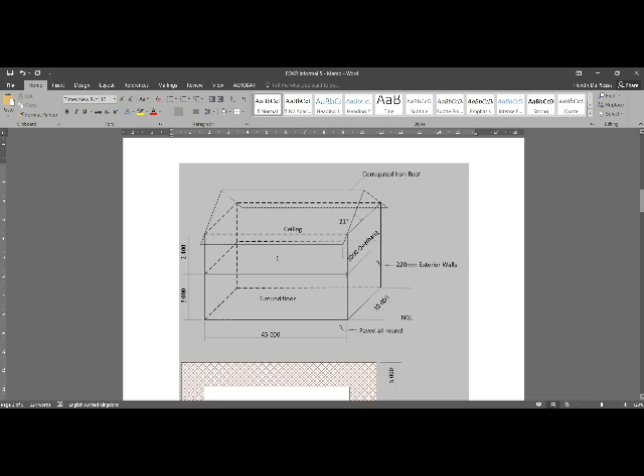Okay, so in the first clip I just went through the question. Now the second section, you will see I'm just going to go quickly through the drawing. So here's our new hospital that we need to construct.

So you would see that we've got a total floor area of 45 times 10, and I had the question on whether you can use a single story building, comparing it to a double story. Yes, in this instance, that was all that you had. If you do have a double story building, it's always good to compare the costs between your ground floor and first floor, if you do have that type of information.

But with this question, you didn't have that luxury, so all that you had to do was basically use the cost that you would calculate from figure 3 and times that with the volume of your figure 1. So just keep that in mind.

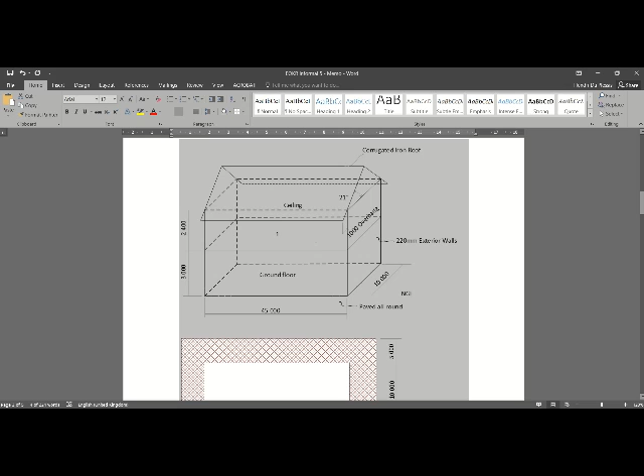Also, you would see that we had some new external paving that was added. I didn't add any external works like pipe work and groundworks and so on, just to keep it simple. Otherwise it just becomes too much to calculate. But you will see as I go through the calculations with regard to that. Obviously, if I do include some other items, you need to take that into account. But usually in a test, that's too much information to try and have in one specific question.

So that was excluded. So the only thing that you had to do was to calculate your volume cost and then add your paving area as well, so that you can actually get to your basic cost to which you can add your P's and G's, and then your contingencies and VAT. Okay, so that was that.

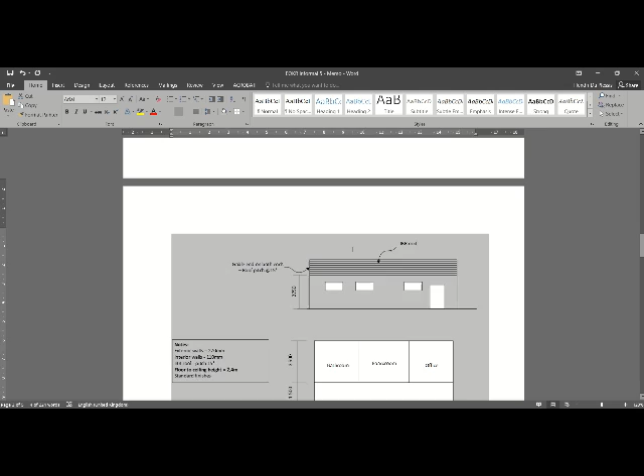Then drawing 2 or figure 2, your historical office building. The only purpose of this building was to calculate your paving area. So you didn't have to calculate the volume of this, and you would see there was a couple of catches here anyway with the wall plate height, the ceiling height, and so on, which all differed, which I think many of you guys took cognizance of. Just be aware of that. That might be a thing in other questions, to actually use the correct height.

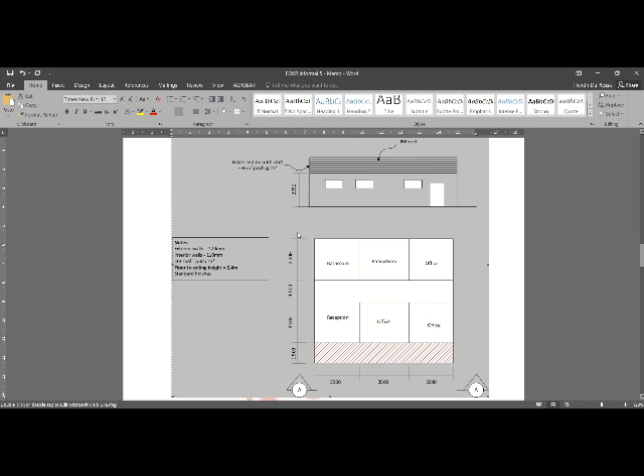So just remember that if you use your cube method, it's from the top of your strip footing up to the middle of your roof area. So it's always good to draw it out from the gable end, just to see that you've calculated your height correctly. So just make sure that you've got that. Okay, so have a look at that so that you understand how that's calculated. I'll maybe make another video on that just to clarify that, but that's irrelevant for this question. Okay, so that's basically it.

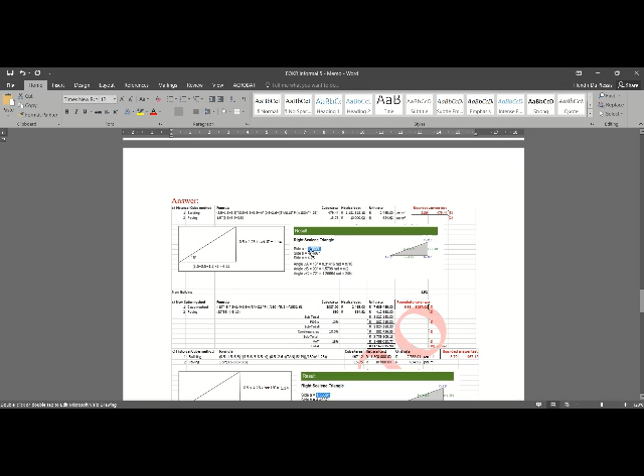So just going through the memo. If you do go through the memo, this is all the information provided, and then you would see I've added the memo and the calculations here. So this was basically all that you had to do, is you had to calculate your historical values. You can see the paving is added here and the building volume here, so that you can actually calculate your basic rates so that you can apply to your new building right here at the bottom.

Okay, and then you would see that I've added two answers. The one actually has your historical rate excluding your P's and G's, and then we've got a second answer which most students used, was basically just using your basic historical value here to calculate your rate per volume.

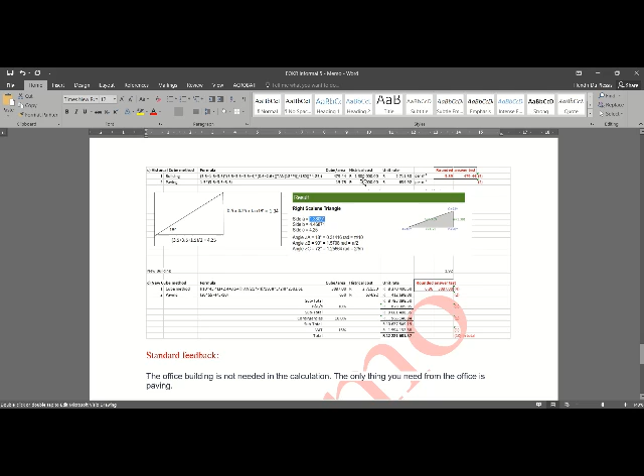Okay, so in the next clip that I'm going to show, I'm going to use the 1.3 million because it's just easier to calculate, but you can have a look at the 1.1 million that I calculated here, how that was done. I'm going to explain that in the next clip, and also in the next video with the next method of calculating your new building estimates. Okay, so just be aware of that.

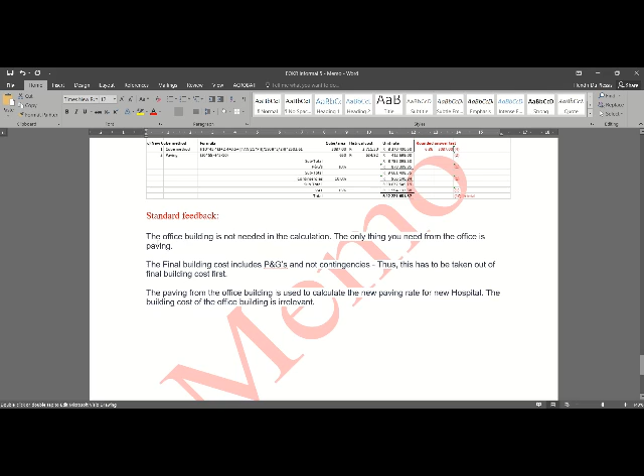And also then I just added one or two basic feedback items here at the bottom so that you can just see one of the common things that was asked. So in a nutshell, that's basically how the memo works.

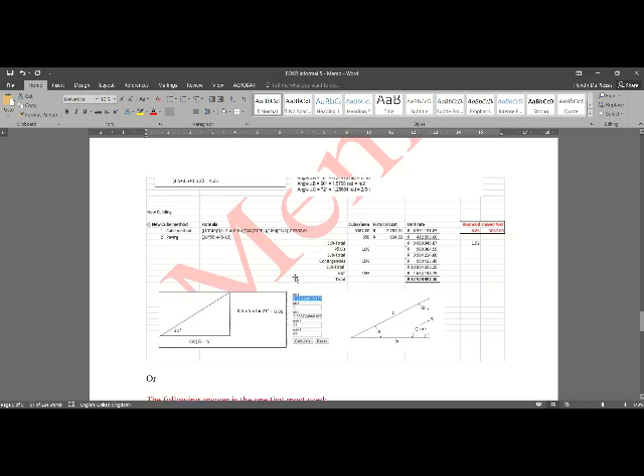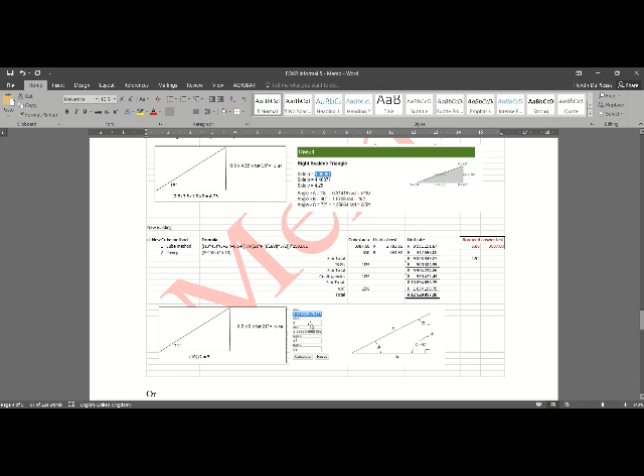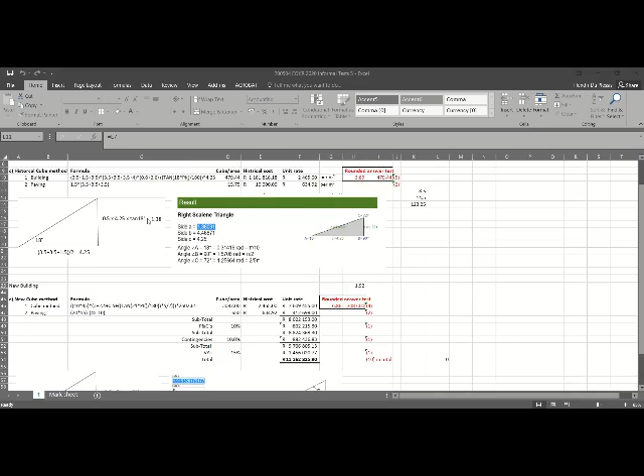Okay, so let's get into the calculations. Firstly, our historical building: you would see that the memo shows you basically the following, and you will see that I've added how the area was calculated first. That is times with your total height. So you go to your drawing.

So the first applicable area or volume that you need to calculate is your figure 3. So you would see this is the 3.5, 1.5 and a 3.5 added together times your length. So it's your length times your breadth, and you would also see that the information actually showed your wall plate height as 2.6 here,

and also the top of your strip footing is calculated by subtracting the 200 millimeters here from your 800 millimeters here. So you couldn't use the 0.8. There was one or two students who actually used the 0.5 instead of the 0.6. So just make sure that you do read your question thoroughly whenever you do that.

Okay, I'll do a little clip on how that is calculated, because you would see that this is calculated to your wall plate height. So just bear that in mind. So let's get back to the calculations. So you've got your 0.6 here and your 2.6 meters to your wall plate height, and then you've got your tan calculation here, or the middle of your roof.

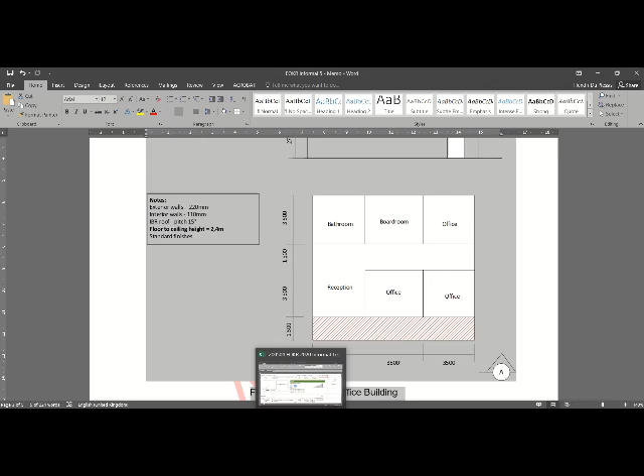you with that. So you would see that you calculate your area, which is again your length, the 3.5 plus 3.5 plus 3.5, times the 1.5 meters wide. So to get your volume or your square meter area, which is this 15.75 square meters here. Then you take your 10,000, that's here in your question that was provided, and there were no P's and G's included in this because this was your basic cost given to you.

Okay, so again, make sure what is included in your basic cost and what is included in your final building cost. So a little bit of a trick question if I do ask that, so just be aware of that. Okay, so then basically just divide your 10,000 by the 15.75 to get to your 634 rand per square meter. And that's basically how you calculate your historical data. So in the next clip we're going to apply this to our new building.

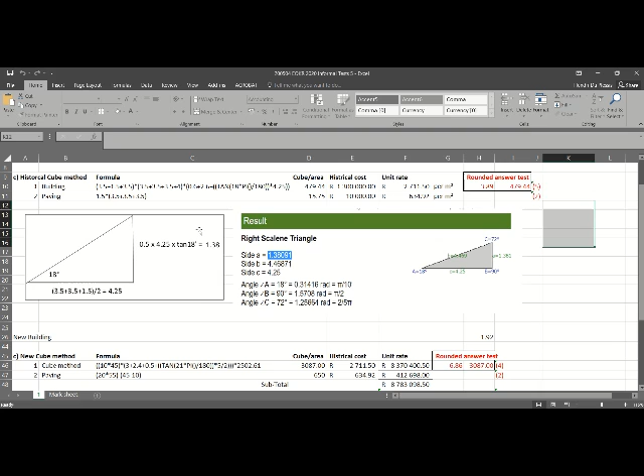Okay, so here we go. Now we can calculate our new building. So you would see it's the 10 times the 45 meters to get your total floor area. Just remember it's only for your ground floor because you're timesing it with your total height. So do not use your calculation for both floors to times it with the height, because then it will be the same as doing it for two buildings.

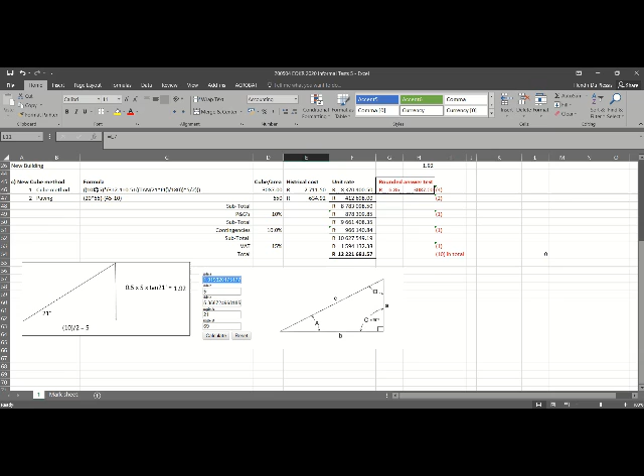Why I'm saying that is sometimes I do ask to calculate the final cost using the square meter rate and then the cube method to compare the two, and then students may use that calculation that you did for your square meter area. So just be aware of that. Do not take a short route when calculating your volume. Okay, so your 45 times your 10 for your square meter of your hospital.

Then you've got your height that you calculate, which is your first floor plus your second floor plus the bottom, or to the top of your strip footing, and then the middle of your roof calculation, which you will see that I've added here the cheat sheets again, from which I just did this little drawing so that you get to an answer of 1.92 and you divide that by 2. So here I've just done that to make sure that the rounding off is correct, and so it's a 0.5 plus 2.4 plus the 3 plus the 0.96.

Okay, and now I see it's just given it in rand, so I'm just gonna quickly fix that. There we go. Okay, so that looks a little bit better. Okay, cool. Looks fine like that. So just be aware of that, that's not rand.

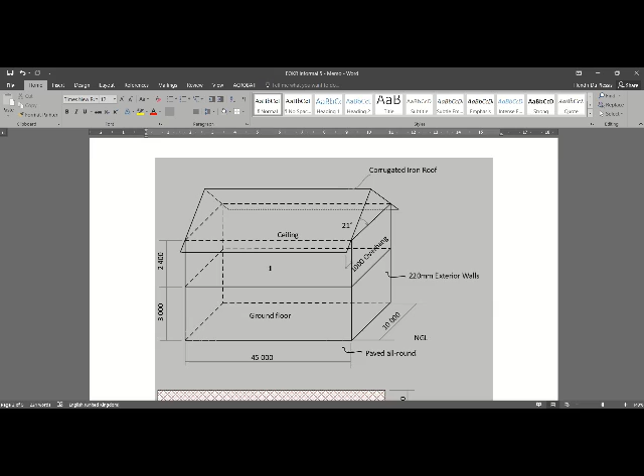So your height, if we just go back to our drawing, you will see there's the 3, there's a 2.4 up to your wall plate. Here you can actually see nicely how to calculate your triangle. If you're in doubt, for instance, if I do give you the ceiling height and then you have to add another 400 millimeters for your beam filling to get your wall plate height, always draw it out if you're a little bit unsure, just to see what is asked and how it actually works. Okay, so I think everything should be straightforward from there.

Then you calculate your area, and you get to your volume of 3087 cubic meters. Then you take your rate that you calculated previously, you times those two together, and then you just add your paving to that to get your total basic cost. So from your basic cost, then you add your P's and G's, add them together, add your contingencies, add them together, then you add your VAT, add them together, and so on. Okay, and that's basically the calculation.

This last little bit counts about 10 marks. So it's again that for your cubes that you have to calculate, and then using your historical data. Then this was just using those two. So this is a little bit of bonus marks, these two, and then I just added 1 mark for actually doing the calculation correctly. I think there's a little bit of a mistake here, so this should actually be 1 there as well if your answer is correct.

Okay, so what would have happened, many of you would have used P's and G's of 8%, so I would have put that in there, and many would have used 2.5% here. And then I can just work with the percentages that you actually used here. So that's why I leave it open sometimes, and why I'm not too strict on what percentages you use. Although I would like you to use 10% here, because it's usually more realistic in practice, 10% here and 10% there.

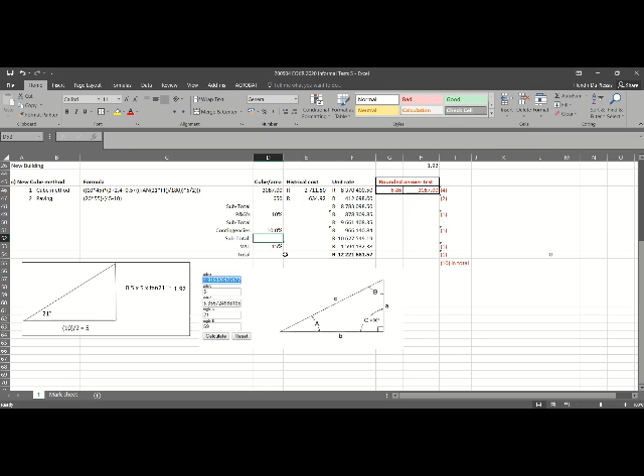Okay, so I'm just going to change that back, and I think that is basically the answer. If you do have any questions, please come back to me, and then I'll gladly assist.